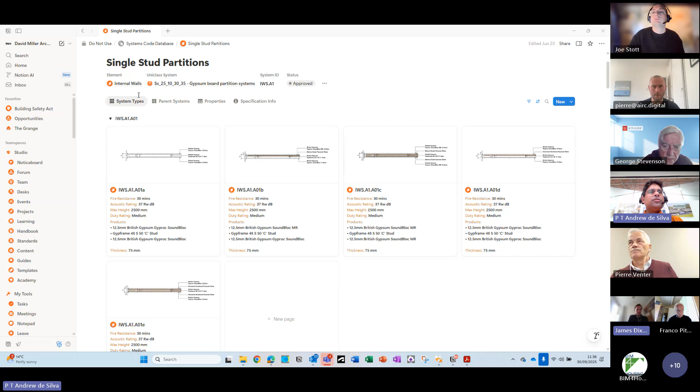No, that's interesting, actually. And one thing I'll just share, which is different to what I was just about to share, is something that we're doing. Let me just share this. Something that we've been working on within the office. Can you all see that come through yet? Yeah. So we're creating content with the aim of making sure it's consistent, compliant, and aligned to the specification, or digitally tagged.

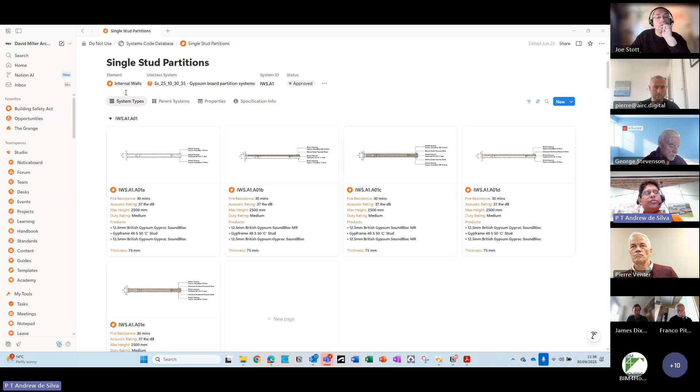So this is the view into, for example, our internal walls, but within our content library, we've created not just things like walls, ceilings, etc., but also looking at things in terms of assemblies. So that could be, for example, bathrooms, which are compliant in terms of their geometrical relationship to different parts, the sink and the bath and the WC, etc.

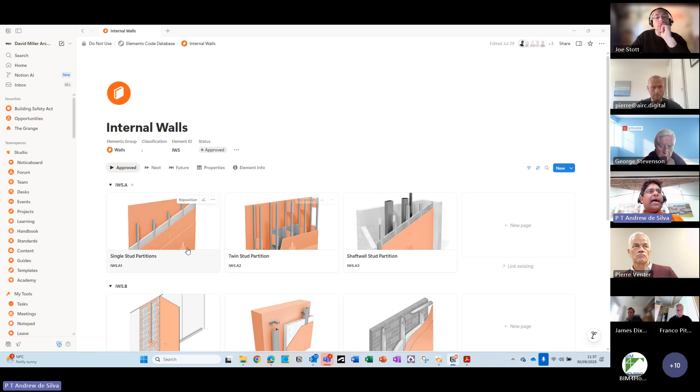So I think this is picking up on some of the things that have just been talked about, where Andy from the team has created a plugin into Revit, which means that all of our info is held in Notion here, but within Revit the team members, and we're also changing the way that the team is structured, can go into this library, the content library that we've created, drill down into what is required from that component or assembly, and then choose the relevant one.

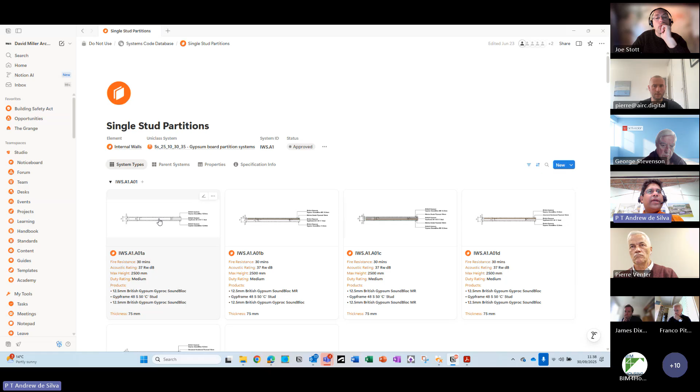And then when you bring it in, it's got the information, but it's also got the geometry, and it's also got the things tagged and specified, linking it to our master specification already. So that's something we've tried to do, and it's more powerful when we've got the assemblies, because there are so many permutations of an accessible Part M4(3) bathroom, and you would waste a lot of time if you're asking junior members to read Part M, trying to unpick the requirements, and then design it into

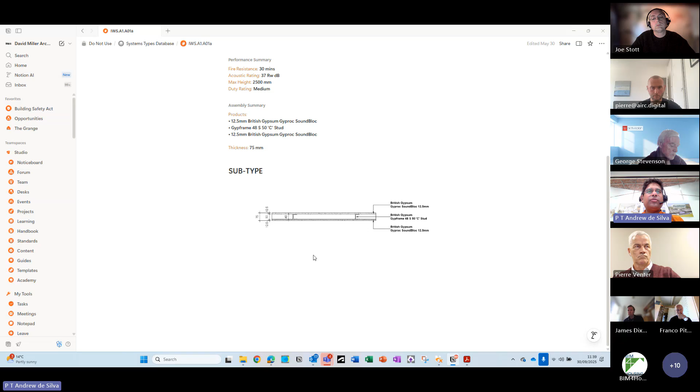one of the schemes. So we're trying to get, whatever the sector of the project, a large amount of it pre-authored and created, which can then be brought in. Clearly, there's going to be bespoke elements, because all projects will have bespoke elements, and that's where the architectural interest or the site-specific requirements kick in.

And then Andy and Lee, who's the head of spec, and the R&D team are working to make sure that it is given a particular name, as you mentioned, so that it allows a door to be aligned to the ironmongery set, to the specification, etc. So that's something we've been doing to try and standardize the components and make sure they're all working or compliant, which helps us as a practice with the Building Safety Act, but also generally meeting the employer's requirements or the regulations. So that's something that's been working for a long time.

Then coming back to the project I mentioned, like I said, this is a scheme. Let's get right into it.

Sorry, Jason, James, got your hand up. I didn't realize it did that. I didn't realize it gave an automatic. Sorry about that. I love that.

The one quick observation: if you have the BG White Book product data reference in there, because that is the one thing that commercials will use to talk back. We do, yeah, we've got that in there as well. So that's embedded into our little ecosystem of software that we're using: we've got Revit, we've got NBS for the specification side of things, and then Notion is what you saw.

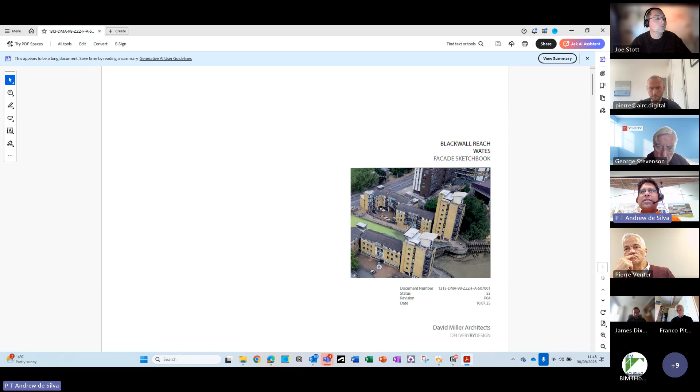The good thing is that most of the building, from a combustible point of view, is brick. So actually, we're only talking about specific areas, which relate to the timber cladding and the timber decking on the balcony. So as a first pilot project that the team are going through, it's a really good one to do, I think. But it just shows you what complexities there still are.

So Wates had a point cloud survey conducted for the entire estate. Picking up on Pierre, that surveyor then produced a Revit model. As you can see, fairly basic in terms of internal elements, but externally accurate geometrically, which is the key thing. From that, we've generated this document called a sketchbook, essentially looking at the different details that we need to resolve.

So one thing is the timber cladding facade. We've tried to look at what's existing, keeping in mind we don't have any as-built information. There are areas in here. Sorry, is that intrusive? How do you know the wall build-up from the point cloud? Good question. I'll come on to that in a second. So we've made some assumptions in here. All of the red text is assumptions.

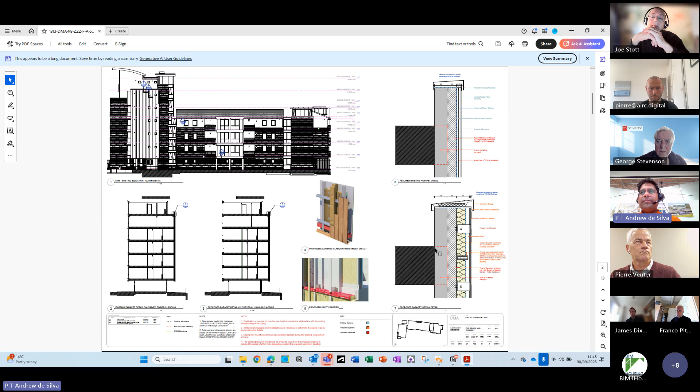Before we started, a company called OFR, who are fire consultants, did a fire risk assessment external walls review, which included some intrusive surveys on site from externally. That is why we know the build-up of this timber cladding. They cut holes in it. I'll show you some photographs in a minute as well. So some things we are able to know because they have been physically opened up. Then we generated proposed build-ups, again based on a fair amount of assumptions, as you can see from the text here. So that's what we started off looking at.

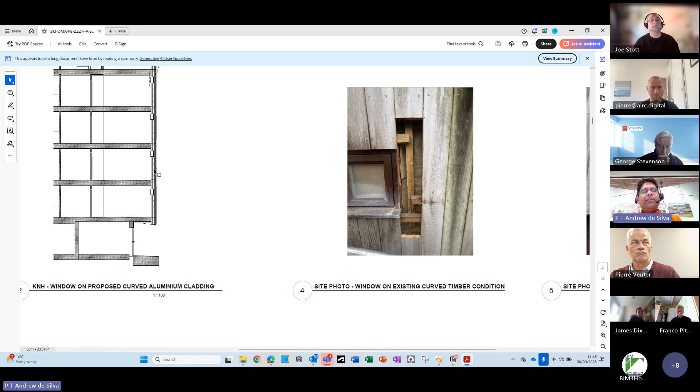You can see from these photographs, I'll just zoom in a bit, these were done by the initial fire risk assessment external walls. That enabled us to take the point cloud survey, which had generic wall thicknesses, 250, 280 mil thick, and break that model to create a more granular version of the external wall based on what we'd found. Still didn't give us the full picture. There were still areas we didn't know, predominantly what is behind this breather membrane and how thick the blockwork is behind that. So that was where we started.

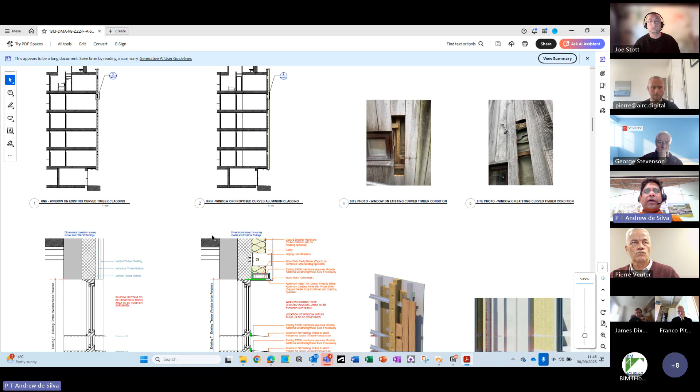So you can see that we've looked at those things and started to generate the existing and the proposed for all of the different areas within that curved timber. We also had some instances where there was an interface between the brickwork and render. The areas we were looking to do were essentially based on the fire risk assessment and areas that had to be remediated to make the risk tolerable. And the balconies all had timber decking, so that had to be removed.

And finally, there were areas where they found EPS insulation. Most of the scheme already had mineral, so that was good. But some areas, these projected bay windows, had EPS insulation. So again, we understood some elements of it, but not the whole picture. So that was quite interesting. These are the views from the 3D survey model, and we were identifying where there could be risks of other EPS insulation that we may find. So even though the building was built only 25 years ago, from a data and information point of view, we had very little.

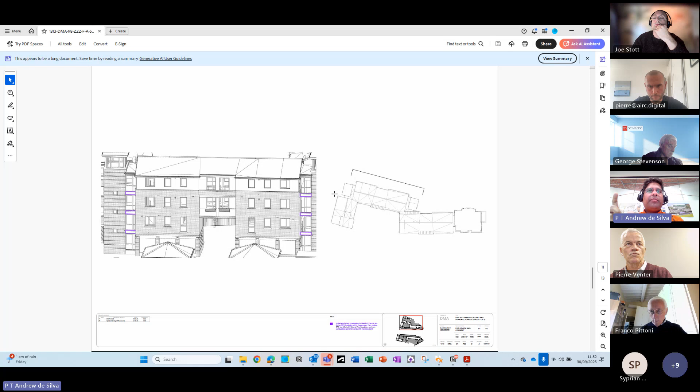No, I 100% agree, Syprian. This document started a little while ago, based on what information we knew from the initial fire risk assessment external wall survey, and what we were doing in this document is highlighting in all of these details, with the red, orange and blue text, which items we didn't know about before we went back to site to do a further set of intrusive surveys, because we had too many unknowns.

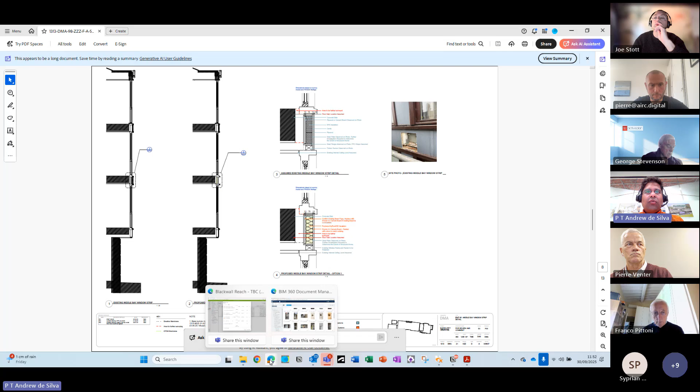So we had generated that report from the information we had at the moment. We then commissioned, with the structural engineer, ourselves and the fire consultants, a markup of those elevations to identify additional intrusive surveys we wanted, to pick up exactly that point you made about the unknowns. This might be a little bit slow to flick through the images. Let me just choose the one.

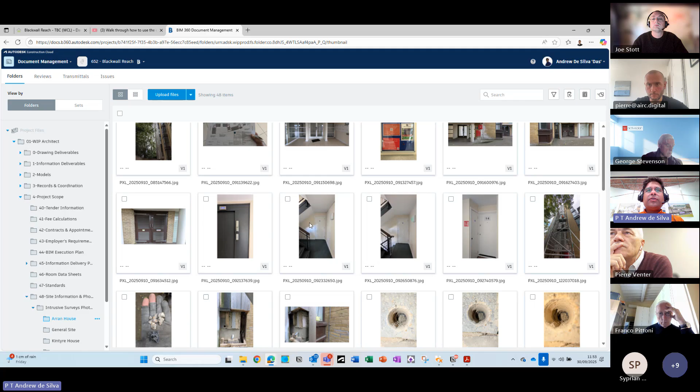So for example, because we weren't 100% sure, we knew what the timber cladding build-up to the blockwork was, but we didn't know beyond that. So we went back and had a large area removed over two different areas in the two different blocks as well. Again, to pick up on your point, Syprian, about not assuming that just because it was built one way on one block, it was built the same way on the other block.

So we opened up both of those blocks, and what was good is that we found the same build-up, i.e. essentially concrete slab, block work, these sort of steel posts, and then the timber cladding. There's no insulation on either of those.

What we didn't know was the thickness of the block work, because coming back to your point, James, the survey model was suggesting a 280 millimeter build-up from outside of the timber to the internal face of the apartments. And we were like, well, the numbers don't add up, because if we had something like 50 or 100 mil timber, then that would leave somewhere in the region of 180 mil. But what was 180 mil based on?

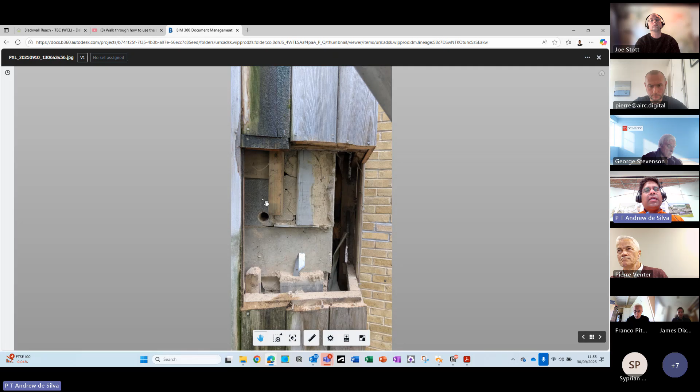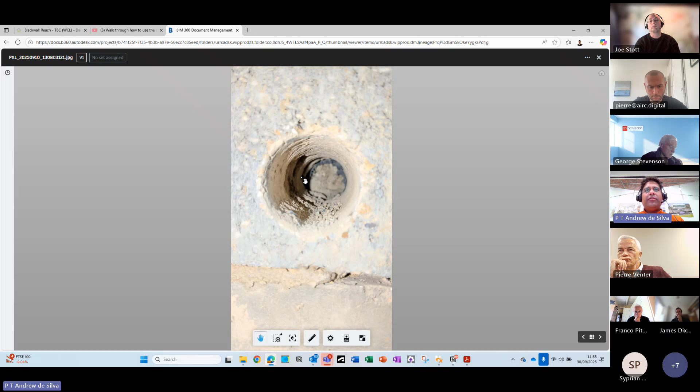Was it based on, let's say, block work laid on its side, which was fairly common practice back in the late 90s, or was it 2 layers of block work, for example, or something else? So we had a core test done, which helped because the core drill was 150 mil thick. It showed that there was clearly one layer of block work, then a membrane, and then something else beyond it. Again, when you did the numbers, it wasn't quite adding up in terms of the survey model.

So since this intrusive survey, we went through different parts of the different blocks. We have 3 different blocks that we tested in the opening up works. We're going to go back again to drill from the inside out, because there's still unknowns. And we're building that into our digital model from the survey that was done. So we're trying to fill the gaps, and each time we do more intrusive surveys, we're picking up on something else that we need to know.

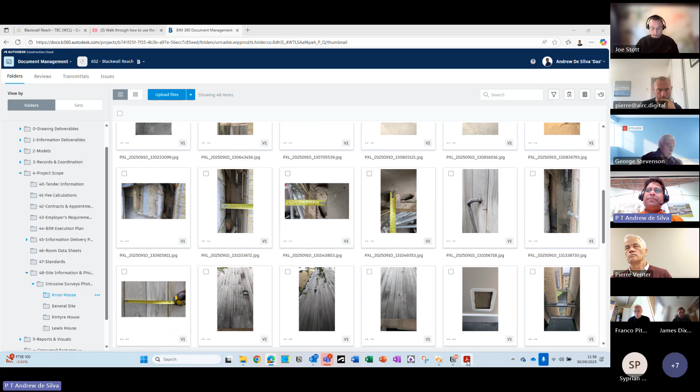To pick up that point, Syprian, that you made, I want to get to a stage where in our details and the specification, we don't have any red notes where we don't know what that build-up is. So all ambiguity has been taken out by carrying out surveys. The structural engineer is now doing the calculations in terms of fixing to the slab edge, which is probably the most realistic solution for the new rain screen cladding system, because we can see from the surveys that the block work doesn't look like it's tied in very well to the slabs.

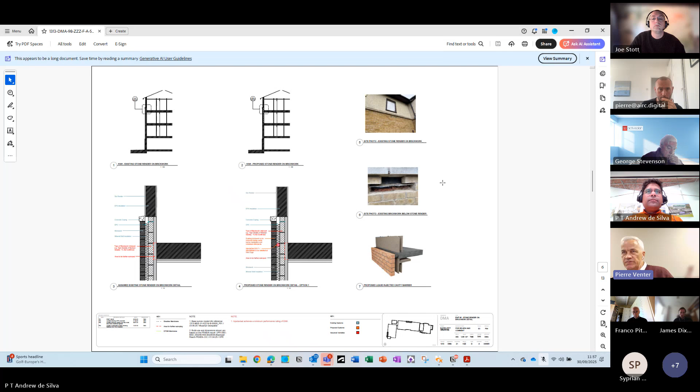Sorry, just a quick question. It's something that I'm busy doing at the moment, which is looking at the scan from the outside, and in those areas that you've identified, at the earliest possible time, to scan from the inside. So you're actually getting the thickness of the build-up, in the same common areas across, let's say, 2 buildings, before you expose it. And it's actually been quite useful to look at what you anticipate being there and what did appear.

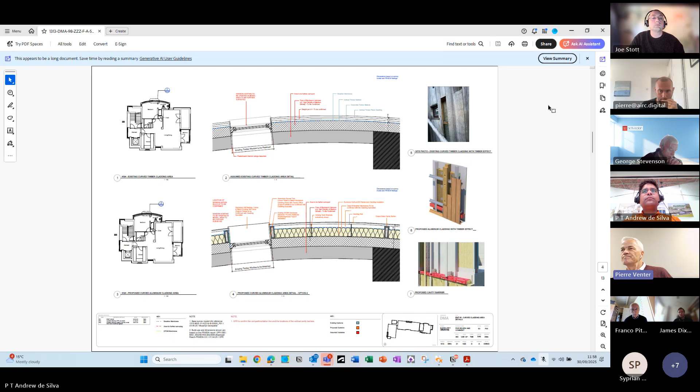But the bigger part for me would be a record for buildings in this particular location, this region, where typical construction methods might be pretty consistent across the board at different levels, tier 1, 2, and white van brigade. Just to give you some indicators of how things actually happened. And that would be not an assumption so much, James, as simply common practice and an understanding. And that then becomes part of a guideline to say, consider this. And that's it. Thank you.

No, that's right, Pierre, because what we found is, before we went onto site, the original fire risk assessment had opened up various things, and the weird thing was, not necessarily this bay, but in one of the bays, EPS was used as the insulation. So we were like, well, was that practice or that material used in other bay windows as well?

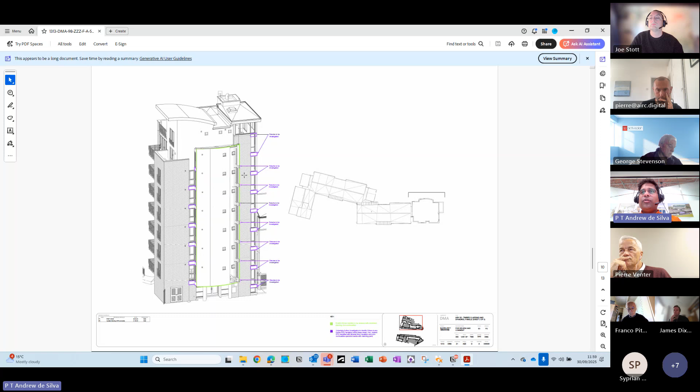So as part of the second intrusive survey, core drills were taken into all of these spandrels to make sure that there weren't any other areas where a bit of rogue EPS was thrown in by the contractor. Luckily for us, I guess there wasn't any other found. It was just in that one bay that they had decided to use EPS rather than mineral wool, for example.

And that's also why we wanted to check across the 2 buildings to make sure that the timber cladding buildup was the same across both as well. Because clearly one might have been built slightly later, there might have been some material supply issues, and they couldn't get everything in time, so they changed the material.

So that's where the danger, I guess, lies, and the need for quite expansive surveys to make sure that you haven't missed something, which then could be a problem when you get to site in terms of the change control things, Syprian, that you picked up and noted as well. So we've still got a fair amount to go.

And as you can imagine, there's now elements internally that are also coming up in terms of some maintenance stuff that clearly hadn't happened. So, was it built properly in the first place, or has it simply not been maintained properly? So they're getting into sort of grey areas at the moment.

But nevertheless, in terms of facade, we are needing to take, I think, one more round of intrusive surveys, and then feeding that into the structural engineer, the specialist subcontractors that'll get appointed, and the facade consultant to make sure that what we're putting back is compliant and is suitable for this particular building type. So that's kind of where we are in terms of that process.

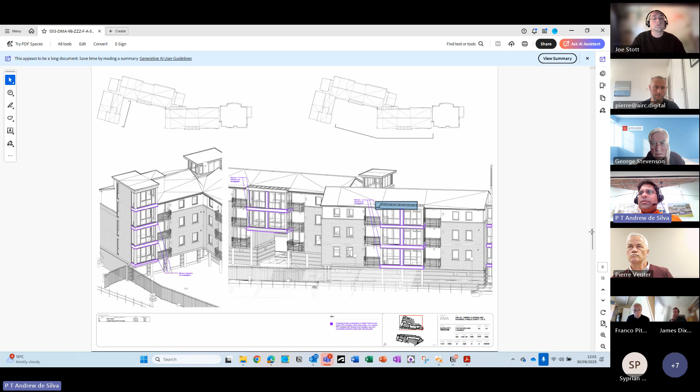James, you got your hand up? You mentioned material shortage. Were they 2 different buildings? The one at the front and one at the back? No, they were. If I just go back here, I would wager 2 different subcontractors built it.

I would think, first of all, I appreciate this is a remediation, but what it does reinforce is if the detail was to not have that membrane, then how is it possible that the building is actually constructed in some locations with that membrane? If you have a proper QA regime where you can evidence how you built something, you would flag something has gone in not by approved detail. There is clearly no QA if one facade that's identical to the next in a different location has been constructed differently.

Yeah, who knows what happened in that particular case, because if they were using EPS on all of the building where that particular detail is, then that would sort of make sense that maybe a different party were using it, but it's only in one bay of the entire 2 buildings. So again, we could kind of go round and round trying to figure it out.

But I think, as I say, the bottom line, if you're doing the project now, things like the technologies in terms of scanning, 360 photography, time lapse, all of those things are what we're learning from this project, what not to do in terms of record keeping. So I guess that's what you'll be doing as main contractor, to be able to evidence and strip back the time. A bit like Google Maps and its archived photographs. You can move the toggle and see what it was 20 years ago and what it is now.

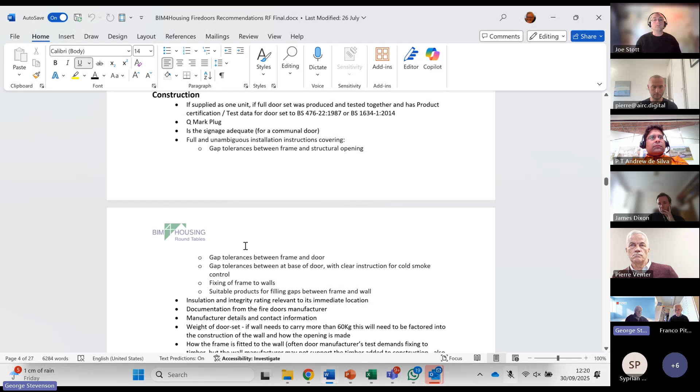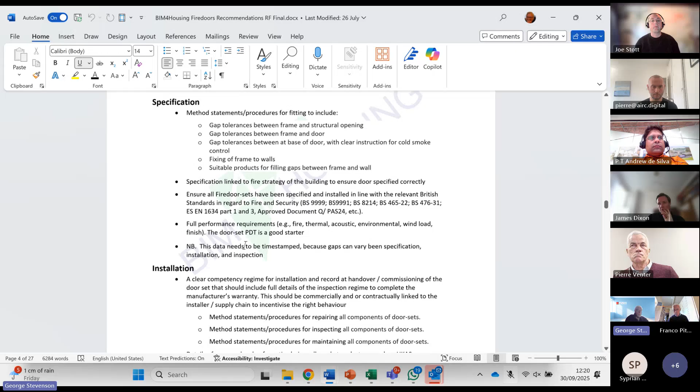Also, what information do you need from a point of view of specification, what materials are being used, the construction detail, the installation detail, inspection and maintenance. So we've got this level of detail, what tasks are needed, and then also what competencies are needed, and how should change be managed. So we've gone through that exercise with all those different asset types.

And last week we ran the workshops. They're all recorded. But what we've also done, which is new, is we've generated an AI podcast, really, that's been generated from the conversation. And I have to say, I think it's extraordinary. And if you're interested, I'll send it to you. But the reason I'm saying all this is that this, I think, is also part of the whole process.

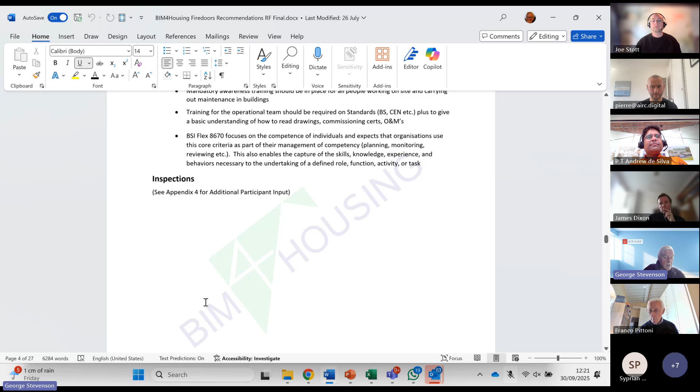Yes, please, George. That's brilliant. Thank you. We've also got a group starting in a couple of weeks' time on lifts. So this is a brand new one. So we're going to have a group of people who are subject matter experts on lifts telling us what information is needed. That would be fantastic, because working with lift manufacturers in this context is extraordinarily difficult. Yes, they don't want to play at all. Yeah, we seem to be breaking through that, James.

So, you know, if you want to be part of any of those, the first thing is to obviously be able to use and access what we've already produced. From that exercise, we're going to spin things off, because what we want to do is start creating AI agents that can then interrogate that information and then identify what's needed and what isn't needed. Because the challenging thing that I'm coming across all the time is that it's the interrelationship of this information that is so critical.